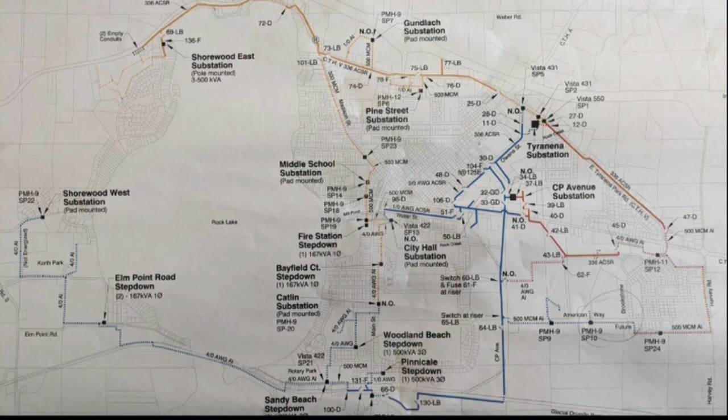For the rest of the next 36 hours, my crew was on call, out in the field that whole time, addressing exactly what had happened. We ended up finding meters that had been blown out of their houses. We had 22 of these in total. We're also still dealing with meters that are malfunctioning, and we have not gotten a total on that yet.

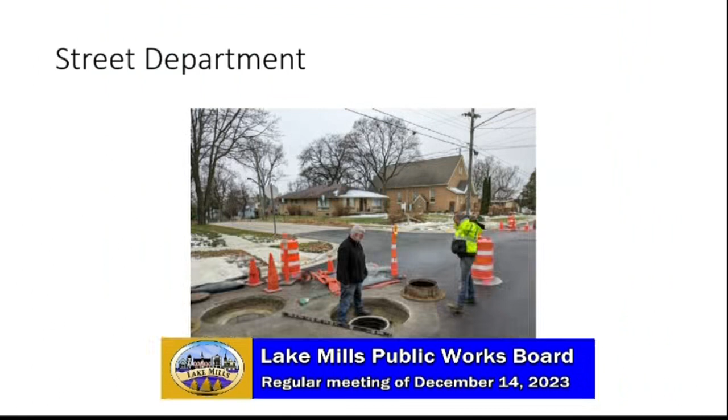Now, in the street department, in the last few weeks, this is on College Street. If you might remember, I told you how we had some punch list items that had to be dealt with, and one was some very low manhole covers that were basically causing a significant drop if a car drove over it.

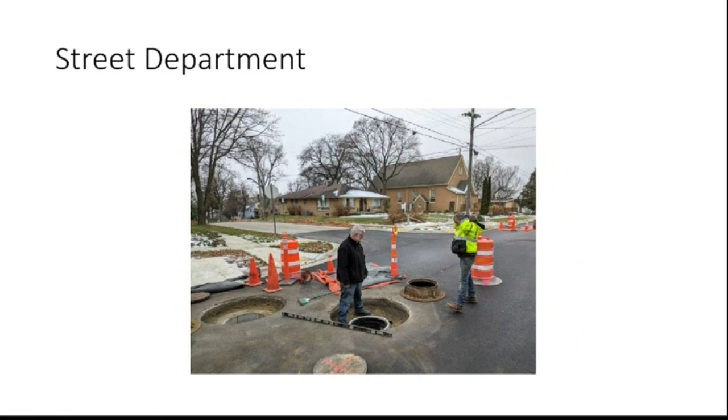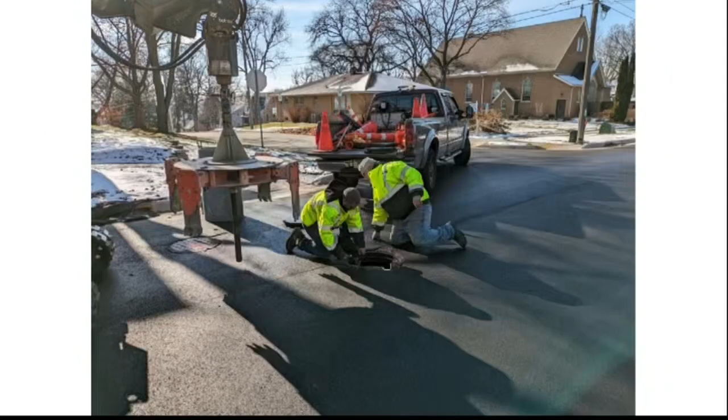So we had the contractor, as part of the contract, remediate these. They did it in a rather interesting way. This circular cutting machine will go and cut out around the existing manhole, then they're able to do a nice clean circular cut of the asphalt.

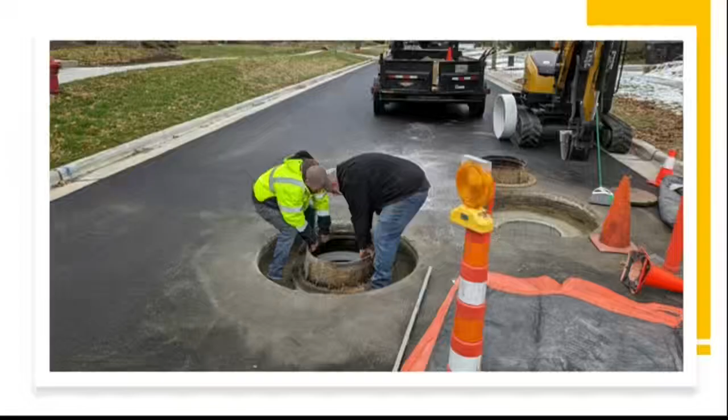They then put in a riser after they measure it, and replace the casting. Then this is the end product. They backfill with concrete. Because of the cold weather, we took cold weather precautions for the concrete with blankets for a period of 7 days or so, and I feel it was a good success. I was very pleased with the end result.

This has been the balance of the time we've been spending with the decent weather we're having. We're really pushing to fill in as many potholes as we can before plow season starts.

Can I ask a question about College Street? There were also some patches between the curb and the sidewalk, in the terrace, that were re-excavated. I saw some new grass, overlays in sections. What happened? One of the residents requested that we mill out the tree stump that was in one of the terraces, so we did some late restoration there. That was primarily it, just restoration from the project.

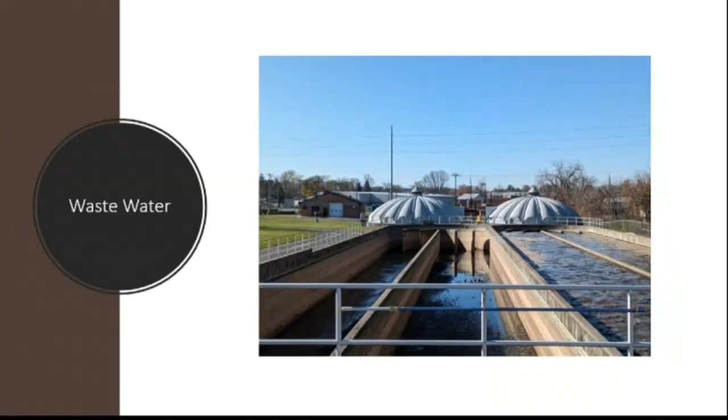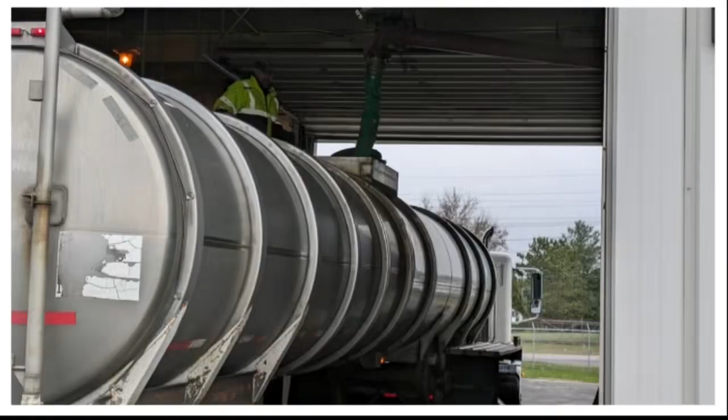Moving on to wastewater, exciting things are happening if you are a wastewater nerd. First off, this time of year is when you try and get rid of your sludge, and this is very important, our tanks are filling up. We do this per our DNR permits, but we spent about 2 weeks getting rid of our 3 tanks of sludge that were very full. I won't explain too much in detail of what they're discharging into the tanks there.

Now, the exciting things that are happening, these are our oxidation ditches. Every other year we clean one out. We'll dewater it, and what happens is, at the base of the ditch, it's just natural that you'll get grit that builds up. So it's important that you dewater this and start to remove it. This has been a process we've been taking on for the last 2 weeks. It is now completed.

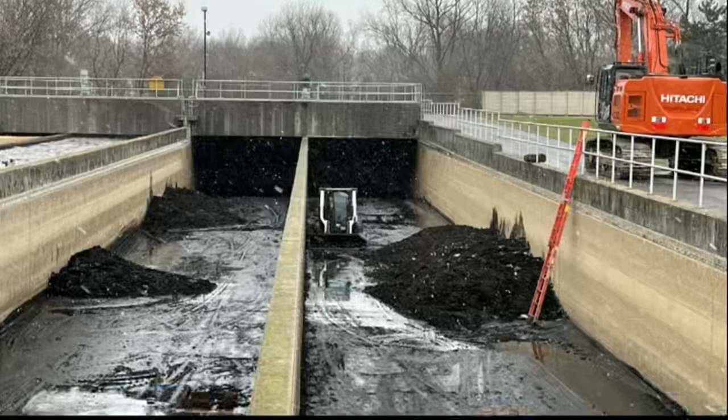You'll see what we do is we lower down a skid steer and start scraping all the grit. This is mostly just sand and dirt, some other particles in there, but we take samples of it, submit it to the landfill, and if they approve it, which they normally do, then we are able to haul it to the landfill.

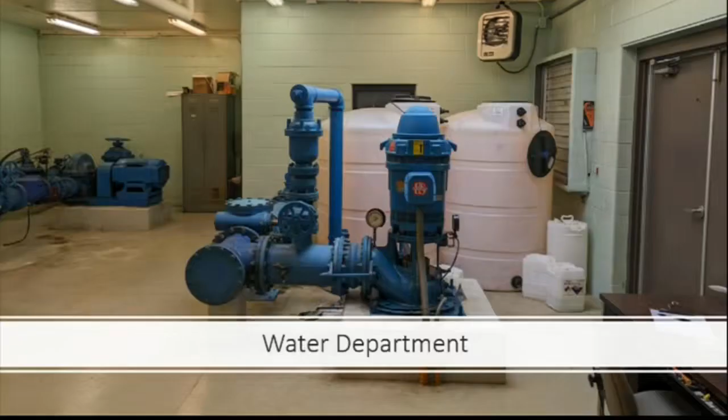Things have been fairly quiet with the water department. They've been doing a lot of maintenance on our wells. During that power surge, we did have 2 wells that were affected and the diesel generators kicked in. So when that happens, it's a good time to do some maintenance on your diesel generators. They often get overlooked when we're busy, until all of a sudden we need them. But everything worked fine in an emergency response.

Just wrapping up the report here, in the Public Works Department we have recently hired 3 new people, 1 in wastewater, 1 in water, and we are hiring a fleet mechanic. Traditionally in Lake Mills they've had a mechanic in the street department, but I've had very good success in my career with a fleet mechanic, someone who can also handle vehicles from other departments, such as police and fire. Working with Drake, we made some budgetary arrangements so we now have a fleet mechanic who's going to get training in fire pumps, and we believe we're going to be much more productive this way. We have filled that position now.

We have also filled the position of utility billing clerk, and we are currently going to be advertising for a position in the street department that has been vacated, just yesterday. And that is my report.

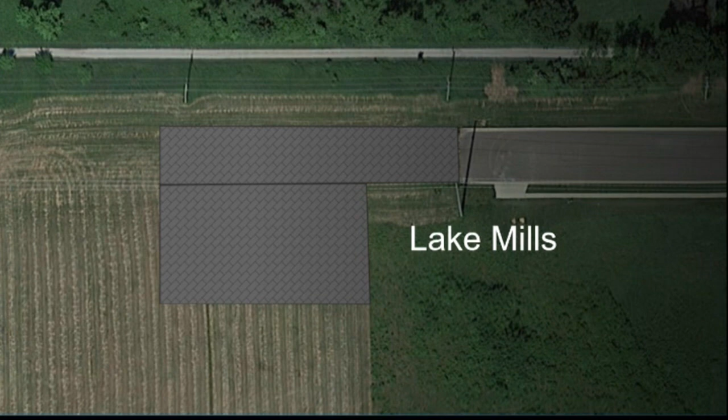Next. So what we are proposing is this is the end of CP Avenue, and we are proposing to clear the topsoil and unsuitable soils for about 160 feet, and then clear the pad for the actual drop-off site here. Next.

And these are just my diagrams to show you what that looks like, give you a visual. How big is the current one? 160 by 60. I'll have those dimensions out here soon.

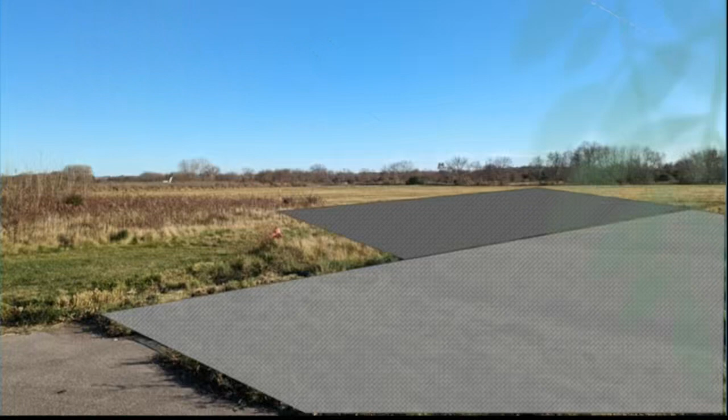Another slide, next. But you see, we do have a lot of open space there to use. Next. And this is the beginning of what we had proposed building.

The dimensions of the pad mirror the ones that currently exist. Again, it's about 155, 160 wide by 60 feet deep. We currently have 3 bays, but one is for other construction debris to be dropped off.

But we propose to build this roadway and pad with 3-inch stone for sub-base and then 1.25 for the base. And the red lines represent fence. Next.

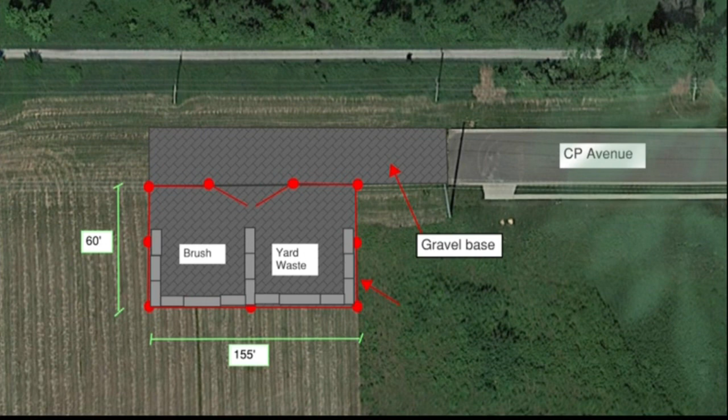And then if we want to consider, we have the ability to run power down these 2 poles here, and we could put security cameras there.

And yes, then go with that fencing. Now I just want to point out, we could have considerable savings if we were just to run the fence across CP Avenue here and then put some barriers up here. So we do have a few options there, but for the cost slide I'll be presenting here, I did not put that in there of the savings we'll have if we just ran a fence across the road, but just bear that in mind, please.

Next. So what we propose to do is strip the pad in the driveway, build about a 12-inch sub-base of 3-inch crushed stone, and then cap that with 6 inches or so of 1.25 inches. Then we compact the road base and the building base, and then we would contract out or just buy the material for the fence and the gate. And then the options would be the security cameras or anything else we'd like there.

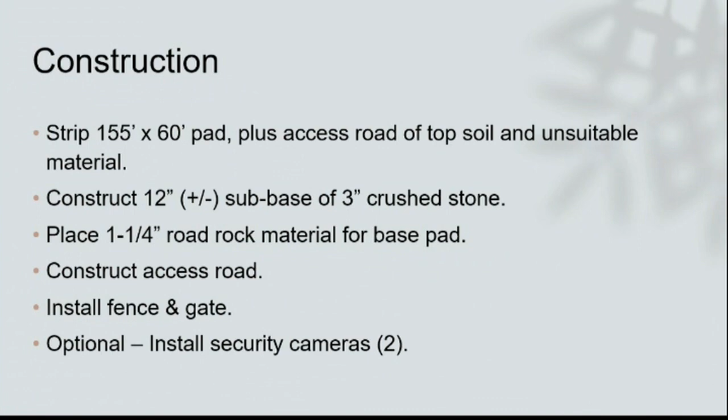Next, please. And these are the rough costs of everything. Obviously the lion's share of the cost would go for the fencing. The stone, there are some variables there for cost. Some stone we do have, some we can acquire maybe at a cheaper price, we'll see. But Mark was able to get these prices from local quarries.

Yes, go ahead, Mark. You're going to say something? Oh, I'm sorry, sorry, I thought you raised your hand there. All right.

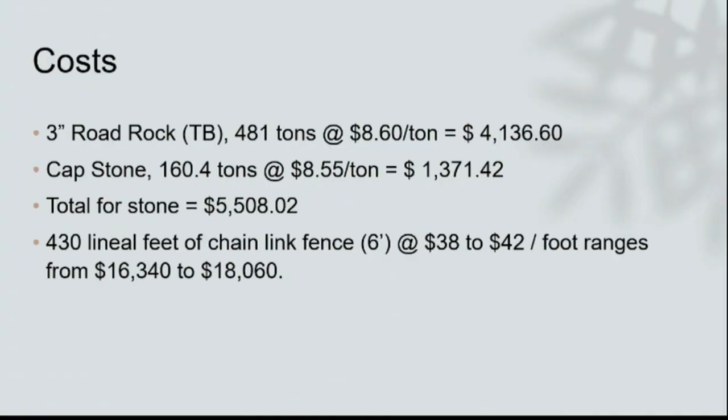But yes, that's where we're at with that. I would propose with current staffing and current location that we could have a staff member open this access up every morning and close it at the end of their workday. But if we want to entertain extra staff or some other sort of controlled entrance and exit system, then you could create your own hours, what you'd feel were best.

Any questions? Can you go back 2 slides, please, Dave? I just want to keep it on that one.

I will bring up too, it just reoccurred to me. We would like to eliminate - currently we are receiving some concrete in that, and this is an extra burden. In the future this would be an extra financial burden for the city. I would like to eliminate that service.

I would suggest we did anyways. This is something that either residents could find ways to get rid of the concrete on their own, take it to a landfill or such. But right now, with this design, we're just thinking of yard waste and brush.

I believe we changed John's disposal contract to allow some disposal of some materials like that, limited quantities. In bulk pickup, I'm not sure what construction materials are allowed. That's a fair question. I do recall looking at the contract and there being a new allowance, but I don't recall specifically. It's something like 50 allowed pounds or less per container, and things like that - not large quantities like obviously the current site takes. But I just wanted to mention that there is already that alternative available to residents.

Okay Dave, do you want to share on your end, or do you want me to share the presentation myself? You can go ahead and share it, Travis. Okay, one second. All right, are you seeing the presentation? I think that's... no. Municipal water. And there we go, now it's up. If you go back to presentation mode. There you go, does that work? Yep, working now, okay.

All right, so talking about the wastewater treatment plant facility planning, I've got a few updates adding on to the discussion that we had in November. I've got some follow-up on the project costs, and then there were a couple of questions from last time that we can talk a little bit about on biosolids drying, and then some of the non-monetary factors for the options we're looking at.

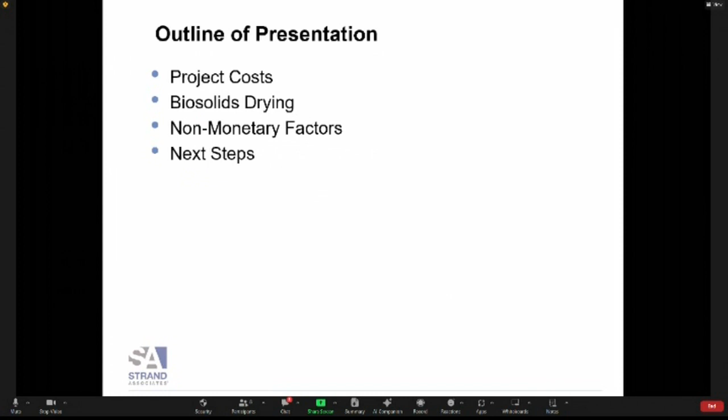So this slide here is just a repeat, you've seen this slide, but I wanted to refresh our memories when we were looking at the draft rate impact, comparing phasing at the existing site with the aerobic granular sludge system versus moving the treatment plant to a new site, constructing a brand new facility. Phasing at the existing site over multiple phases allows you to ramp up the rate increase over the course of 15 to 20 years, and projects can proceed as needed throughout that time frame. There's more flexibility from that standpoint versus going to a new plant. The rate increase, I'd assume, would start once that decision is made, and you'd have to have it complete by the time construction's complete. So it's a much narrower window to get that rate increase accomplished. Just a refresher on that.

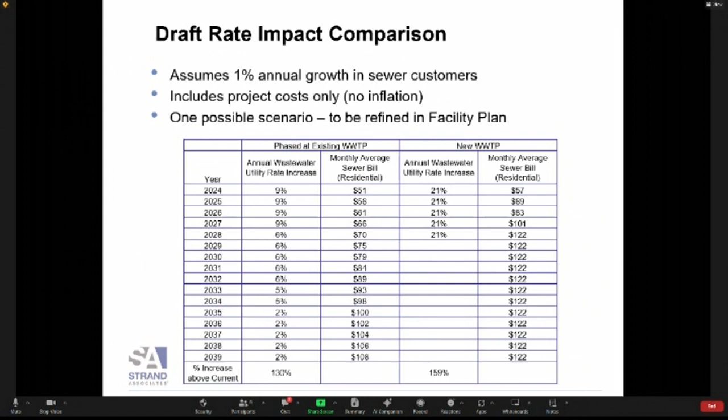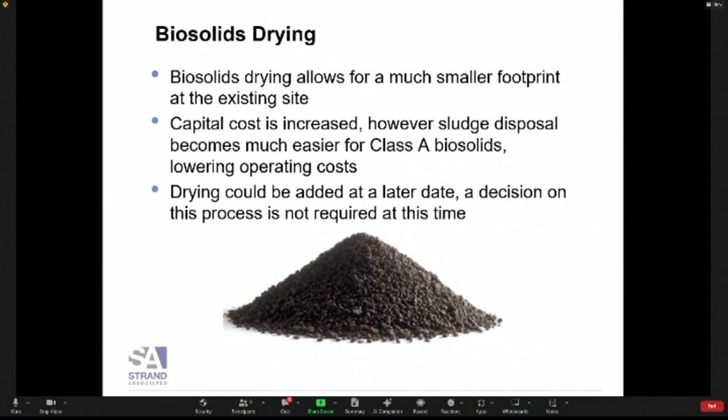So just wanted to revisit the pros and cons of these two options, focusing also on AGS at the existing site, since that wasn't specifically included in the original evaluation, and we've been looking at that more as a way to tighten up the footprint on the existing site. So just going over pros and cons of existing site with AGS versus a new treatment plant. In both instances, I'm assuming they would eventually discharge to the Crawfish River.

So running down the benefits of the existing treatment plant site: you have a significant investment already in the existing site. You own the land, there's an administration building, and there's infrastructure that can be reused, so that's a benefit.

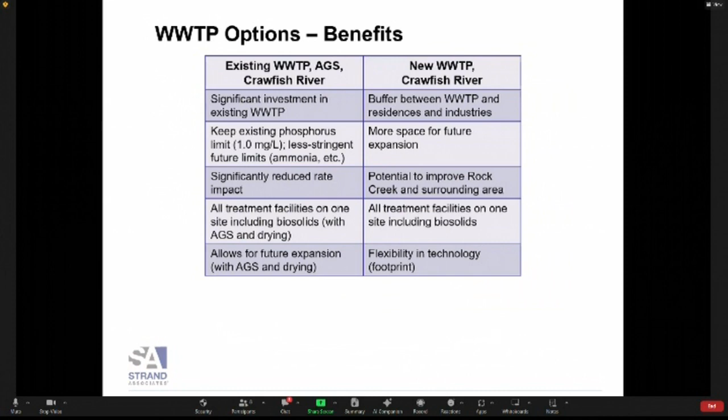There's also potential to improve Rock Creek, and I think that ties back into, with either option we're looking at, moving the discharge from Rock Creek to the Crawfish River is probably the preferred option. Again, you're having all the treatment facilities on one site, and as I mentioned earlier, there's flexibility in the technology. You could really put in anything you wanted on a new site.

And then on the drawbacks: if you stay on the existing site, you will likely need some additional land somewhere for biosolids storage, unless you install biosolids drying. Not immediately, not in the next year, but probably within the 20-year planning period, we'd really have to think hard about how to manage the biosolids program on the existing site.

Land acquisition would be needed for a future treatment plant. So even if you go with this existing site option, it would be good to think about where ultimately, 40 or 50 years from now, if you do decide you want to move the plant, that might be, and strategically purchase some land to accommodate that down the road.

The existing site was built on an old landfill, so that will likely add some cost to the construction. It's not insurmountable, but it is a challenge that will have to be dealt with. It had to be dealt with in the project 30 years ago, and there'll be similar issues that crop up in any future projects.

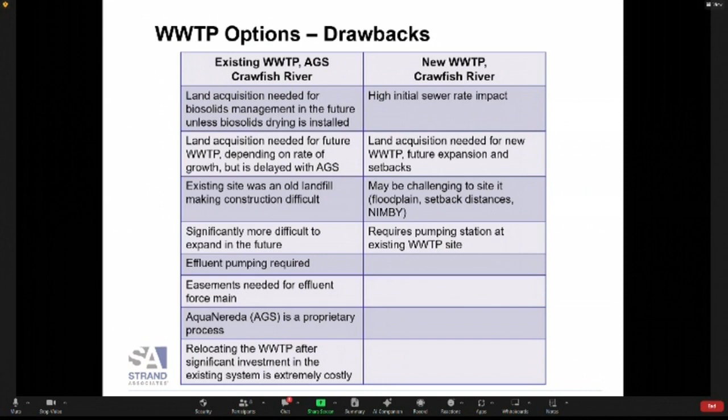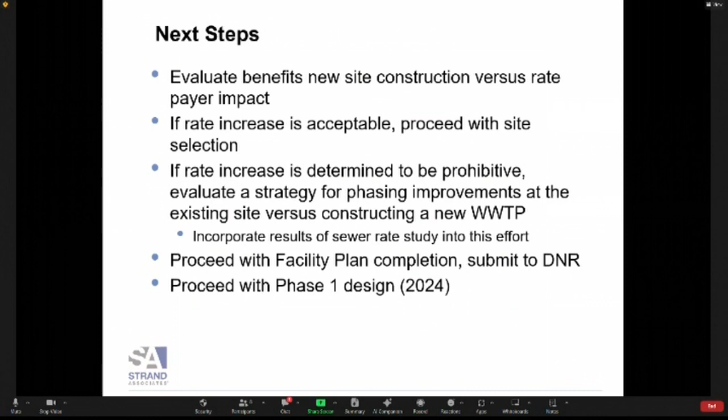So our next steps here is really to decide in this facility planning process if the city wants to proceed down the route of phasing at the existing site or further investigation regarding a new site. And in reviewing the sewer rate impacts, I think that's a significant portion of that decision. And once that decision's made, we need to proceed with development of that facility plan, which finalizes the details of what would be designed and constructed. And then once that facility plan is completed, proceeding into design of either phase one at the existing site or design for the new facilities. So I can back up and go over any of these other items in more detail depending on the interest.

Does anybody have any questions for Travis?

Yeah, Mary? I have a question about AGS due diligence. I think I asked a similar question about the risks at our last meeting. Given that they would be the sole supplier, the risk on acquisition of parts if something goes wrong, expertise, the financial strength and viability of the company. And I don't know how far of due diligence has been completed on this particular firm. I think they're international, with a small number of customers here in the US. So I'm still looking at the risk of that particular option just from a single source perspective. And I guess another way of thinking of it is if we were to choose to go to a new location, would it be our method of choice? That might give me some indication whether the risk is smaller than what I think it would be as a single source provider.

Sure. So the technology was developed about 20 years ago over in Europe, and it's been brought over to the US and it's licensed through Aqua-Aerobic out of Rockford, Illinois, and they are definitely a long-standing wastewater company themselves. Aqua-Aerobic, we work with them on a routine basis. They make all kinds of wastewater equipment, and I would say they're definitely a big player in the wastewater world. There are several plants that have installed this that are up and running, and there are several more under construction. I don't know the exact year it was installed, maybe 5 or 6 years ago. The first one went in the United States, and there's been several installed since then.

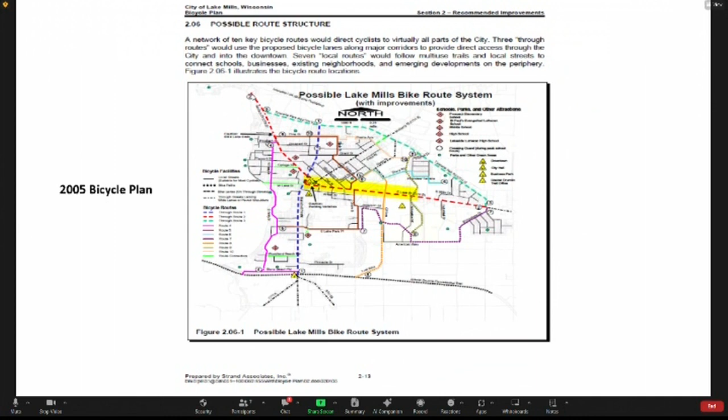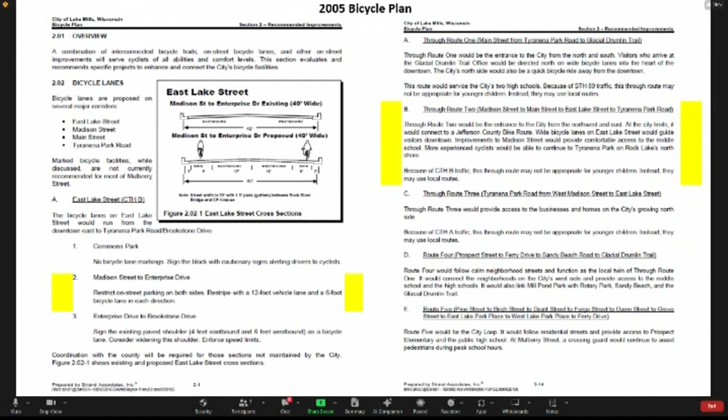The next slide is again from that bicycle plan. The highlighted areas talk about through route number 2 and the area we're talking about, from Madison Street to Enterprise. I'll note this slide, while maybe this isn't the best picture for it, the yellow highlighted does show what we're going to talk about tonight, and it extends from the Enterprise Drive area to downtown and around Commons Park.

I'll note that all of the aerials you're going to see tonight were actually taken in April of '23. They are currently being processed by the county, and hopefully the county website will be up and running soon with the new aerials, but you'll be interested to see the clarity that the new photos bring. Maybe not in this example, but later in some of the pictures, you're going to see much closer pictures and very good clarity.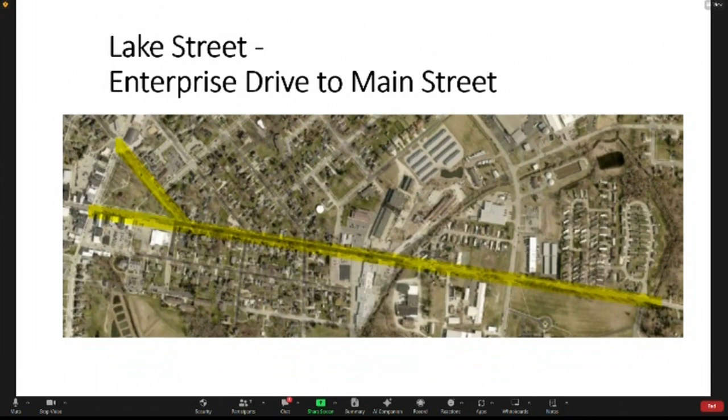Moving on, through route number 2, as we talked about, this is really a connection, and what we're looking at is a connection at Enterprise Drive. The reason we're not going further to the east is that's the location where the jurisdiction of Jefferson County East Lake Street changes. It also is a direct access to a shared use path that goes north and south, which is also route number 9.

So leading into the area of Lake Street, Enterprise Drive to Main Street, we're looking at 2 bicycle lanes, 1 in each direction, and we're evaluating the impacts of low capital investment costs, no major street infrastructure changes, or very little, and then basically street markings required.

The next slide talks about some of the parameters that are used. This is from the Wisconsin Department of Transportation's Facilities Development Manual, also called the FDM. This is a portion of that document that talks about bike lanes on a curb street without parking.

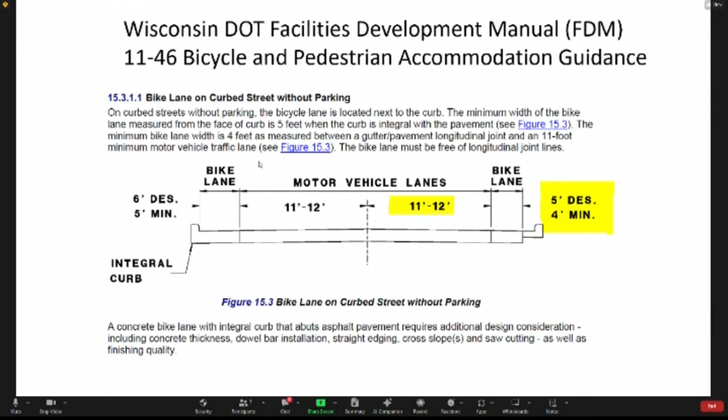So in those areas, typically you're looking at 11 to 12 foot traffic lanes, and then 4 to 5 foot bike lanes. But note that you're not including the pan of the roadway in the case where you're talking about asphalt and concrete transition. So maybe downtown Main Street, that's all integral concrete curb, that would be the left side. But the areas we're talking about today are going to be all on the right side, which is an 11 to 12 foot lane and a 4 to 5 foot wide bike lane, not including any part of the concrete curb. The next slide is also from the FDM.

This shows bike lanes on a curb street with parking, and you can see how that changes slightly. The traffic lanes are still 11 to 12, but the bike lanes are increased to provide more safety from the combination of the traffic lane and the parking lane. I'll note that the parking lane is typically 8 to 10 feet wide, but in this case, now we can count the pan in that calculation.

Moving on, I've provided a couple of cross sections from Main Street. In particular, the one on the bottom shows what happens between Lake and Madison on Main Street, and there is actually two bike lanes and parking on both sides, and that requires, I believe that requires...

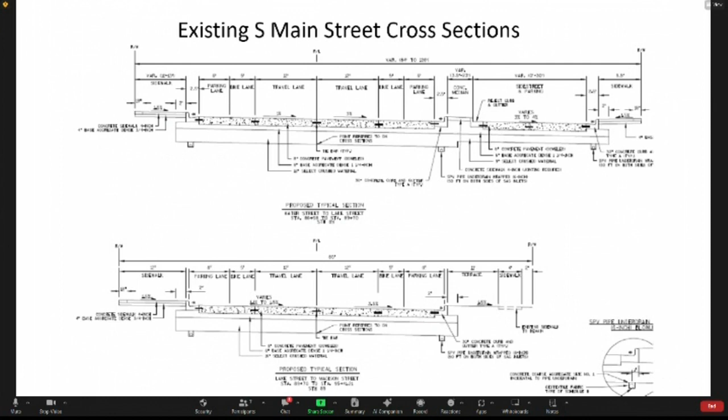51 feet of concrete from back of curb to back of curb. As we extend into our further slides, all of the streets that we're going to talk about tonight are not this wide. So we also looked at a typical cross section down South Main Street, and if you recall, that's one parking lane on one side, and bike lanes on both sides requires 44 feet back-to-back, or 42 if you're using an 11-foot lane.

So I'm using this as we head into this further evaluation. What is the width of Lake Street? Lake Street has a width of 34.5 to 36 feet from Enterprise Drive to Madison Street. The existing width just does not support even one side parking with two bicycle lanes. You need at least 37 feet. So that option is not available.

What could be proposed is eliminating the parking on this stretch of Lake Street, providing two 12-foot traffic lanes with 5-foot bicycle lanes on each side that will fit in this corridor. As we move further to the east...

You'll have to say something because he won't. Dwayne? Is there any questions? Yeah, Dwayne, I have a question.

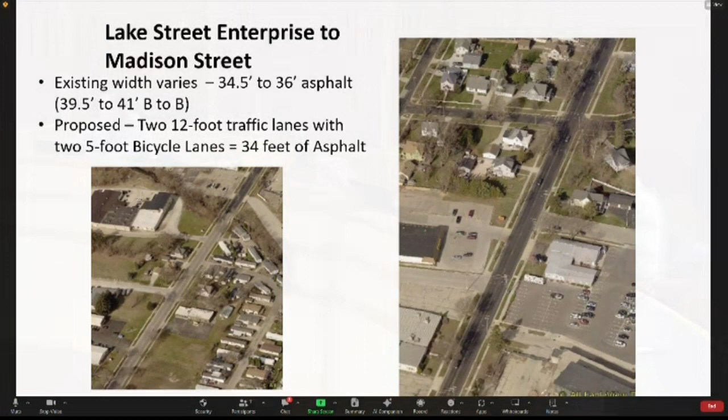Sure. Because you're talking about the... is there a scenario that because I've seen these in some cities, and actually I printed a picture out, where you could do a dual bike lane on one side and then have one side, so you have, it's not for a bicyclist, is not the ideal scenario, because you're going cross, one lane is going with traffic and one's going against traffic. It's on one side of the road, and then you still maintain one side for parking. Would that fit with the width of the street that we're talking about this evening? I'm not saying I'm describing it correctly, but you have your both lanes, your bike lane is on one side, and then you park on the other side, and then your cars are in the center.

So the bike lane supports bicycle traffic going both ways. Both ways. And I don't know if I can pass this down, but I mean, I should have made copies or photocopied it and uploaded it, but I didn't print it out fast enough. The photo has barriers between the bi-directional bike lane and the traffic lane in the photo, like there's a small barrier, and I think it'd be too tight.

I was just curious. It means you use the pan. Is that what you call it, the pan? You'd have to use the full, like the curb. Mary, I do think I know what you're talking about. Again, it goes back to, in order to provide that barrier, you're introducing a capital cost that we didn't look at.

Or paint, we could look into that further. I've seen it with colored paint and not with all of these posts as shown in this picture. It was just a question.

Another option that I hadn't seen in the exhibit you'd been sharing—I would caution, and I think I heard somebody mention it, about having those competing directions. I believe there's information in the manuals that talks about separating those going in the same direction with traffic if there isn't some type of barrier. But I can look into that further if that's something we want to explore.

Yeah, that was my question. I had the same question, but I saw a presentation from the City of Madison planning department. They call them two-way lanes, and they make sure they're wider than 3 to 4 feet—they go with 5 or wider if they can get it. That then allows them to do parking on the other side. The City of Madison does this on a number of different roads there.

I'll go back to the first statement—our analysis tonight was not to increase the capital costs significantly, and so all of those types of options are still out there. My gut feeling is that it probably means we need to push one of the two curbs further to get a little more width in order to do some of those options. I have not found an option yet that allows parking on one side and a two-directional bike path on this street. Does that help answer the question?

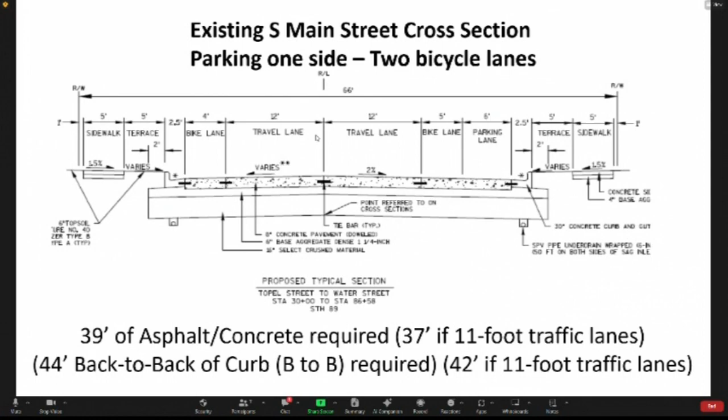Yes, thank you. But I'm sure staff and I would look at other options if this board is requesting that, as we finish the presentation tonight. Any other questions while I'm where I was at? Well, I was thinking maybe we should just finish the presentation and go after those questions after the fact, since you might address some of this.

Maybe. All right, why don't I proceed? In general, as we've been talking about, it's one or the other in this area from Lake Street to Madison Street. I'll talk a little about one option that Mark and I, when we were measuring it, were concerned about, and that was Rock Creek.

It does allow for basically two options here. There's a narrowing at Rock Creek for the box culvert, but it does allow two options: either two 11-foot traffic lanes and 5-foot bicycle lanes, or—and that one's preferred because you have a wider bicycle lane as it comes up to this bridge.

The concern with the first option is if we're at 12-foot wide on the remaining portion of the street, you're going to see aesthetically the lanes narrowing at the bridge—meaning the traffic lanes. So the other option is to keep the 12-foot traffic lanes but narrow down to the minimum 4-foot bike lanes at the bridge.

Visually, the second option is probably better, but safety-wise, I think I would prefer to see option one implemented. But both are possible as far as the width. So the concern we initially had—we did find that there was an option.

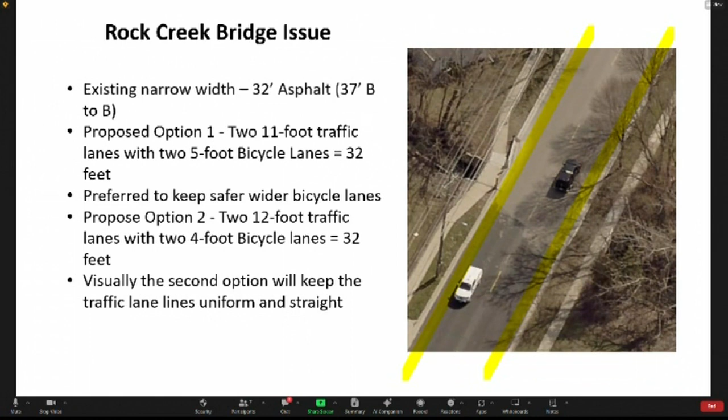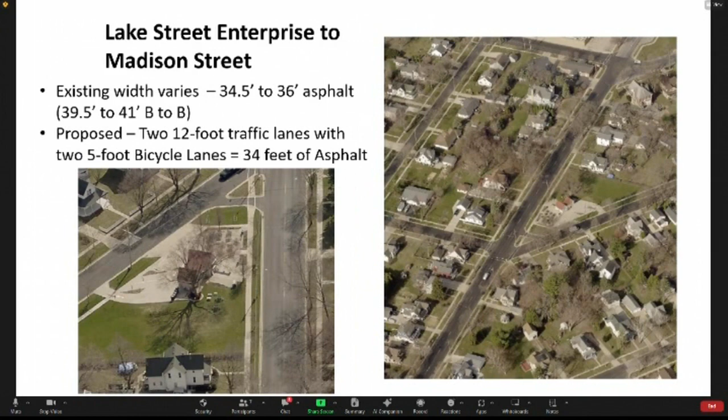Extending east, continuing all the way to Madison Street, the same analysis occurred west or east of the bridge. Then we get into two different topics of how to get around Commons Park.

We looked at two different alternatives. The first alternative is a single one-way bicycle lane along westbound on Madison, then coming back eastbound on Lake Street. So in a sense, you're taking a counterclockwise travel around Commons Park, using the Main Street piece between Lake and Madison as well.

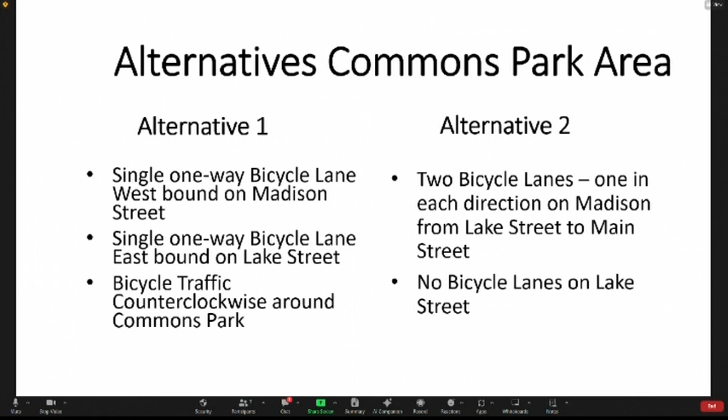A second alternative we'll talk about later is that we can't really extend the bike lanes on Lake Street all the way to Main because of Ford Court, or we would have to change Ford Court. This alternative number two takes both lanes from both sides of the road and turns at Madison Street, connecting to Main Street at that location.

So now I'll head into alternate one and speed through some of the analysis. My next concern, or Mark and I's next concern, was this rumble strip here. It does fit with an 11-foot traffic lane, a 5-foot bicycle lane, and an 11-foot traffic lane. There's 16.7 feet between that rumble strip and the curb. In this area, it's already no parking, so at the rumble strip we're not changing the bike lane or the parking at this point.

On the opposite side of the road, there's a narrowing occurring. Again, that's fine—two 11-foot traffic lanes, the 5-foot bicycle lane, and in this location, parallel parking is 33 feet. There is 34 and a half feet there, so this would work in those two narrowed areas.

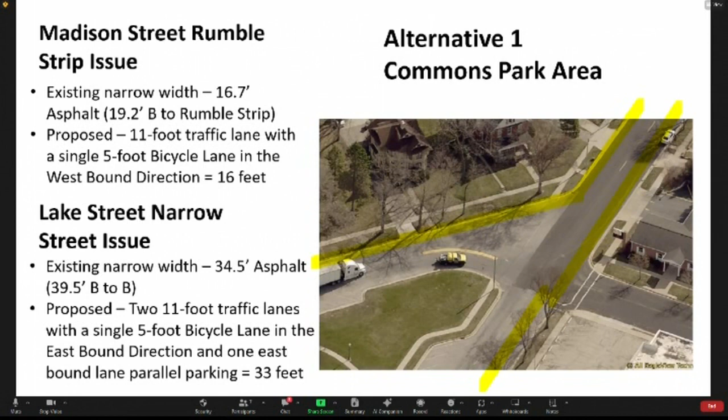I provided a couple documents here. I don't know if we need to go into too much detail—it's from the standard detail drawings. It shows parking layouts in the areas of downtown. They're at 45-degree stalls, so you can see some of the dimensions that we used to do some of the calculations.

There's two options we've looked at. Option one takes away the parking on the north side of the road. We would lose potentially 13 to 15 stalls. It would keep the parking on the common side the same, and would actually provide a little bit of a buffer between the traffic lane and the bicycle lane. Unfortunately, all of those things can't occur in that area.

Option 2 on this next slide talks about the exact same thing, except in this option, rather than losing the north side parking, we're adjusting the south side parking, changing that from angled parking to parallel. This does fit, but unfortunately, changing the angled parking to parallel does cause a loss of 16 to 19 stalls.

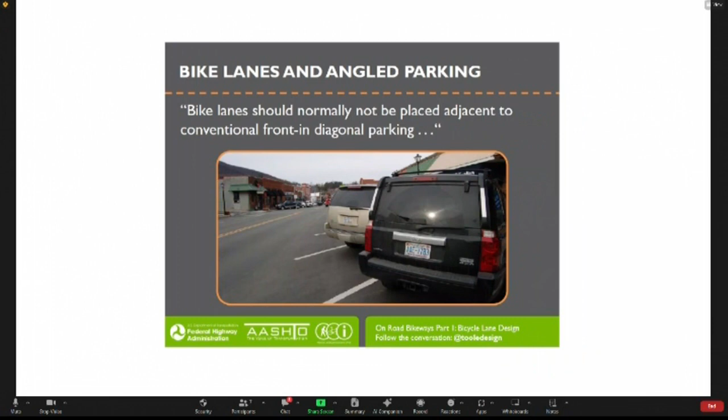So I give you that slide so we can talk about this next portion. In order to make this recommended, we would potentially have to change the angled parking on the south side of the road from Main Street to Ford Court. The width is there, it would work, but it would create a reduction of 6 to 8 stalls.

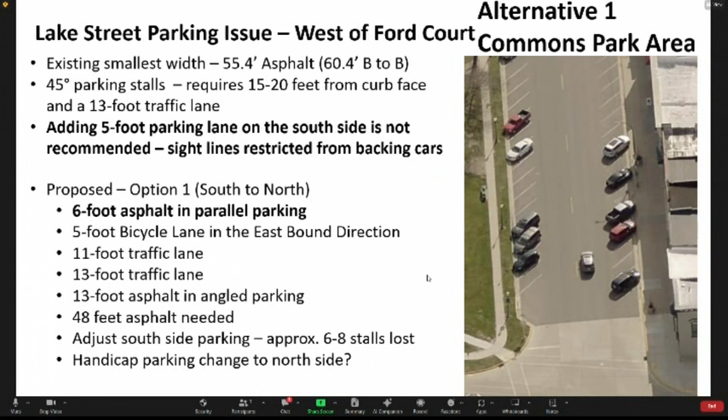One additional factor in this area is there is one handicap parking stall. There's a number of different options—we can move that handicap stall, maybe not directly, but to the north side of the road near Ford Court. It could be marked in one of the existing angled stalls, or we could look at some minor capital investment costs. Here's one example where the curb was replaced and lowered so that the parallel parking handicap stall can access the sidewalk on the right side of the vehicle.

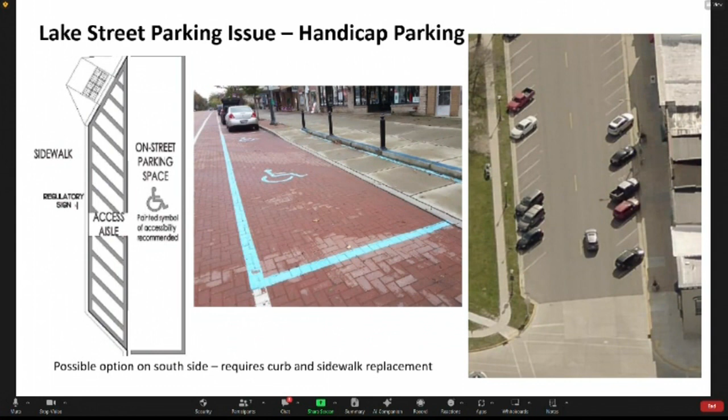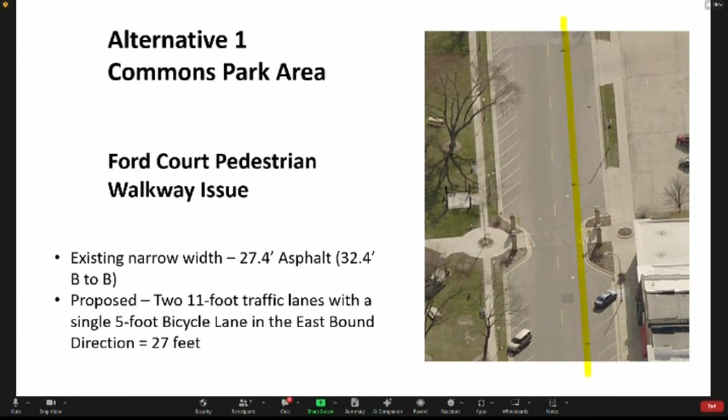The next issue we were very concerned about is Ford Court. It's probably the narrowest portion along this route, but it does allow for two 11-foot lanes and a 5-foot bicycle lane in the eastbound direction. It's 27.4 feet of asphalt, and we need 27 feet. Very close, but acceptable.

Then heading east of Ford Court, that parking would stay the same. The width is appropriate, and that eastbound lane for parking can exist. We've already talked about this piece earlier. As that eastbound lane continues, the width is there for maintaining the parking.

So let me summarize alternate one. Alternate one, option one, going around Commons Park unidirectionally counterclockwise, we would lose somewhere between 19 and 23 stalls. This is option one, losing the north side parking on Madison Street and changing a portion of the south side parking on Lake Street to parallel downtown. Again, it removes, and in that number is...

All of the parking on Lake Street east of Madison Street is gone. Option number 2 in alternate one, changing the angled parking on Madison Street, and also the angled parking on Lake Street, accounts for 22 to 27 stalls lost.

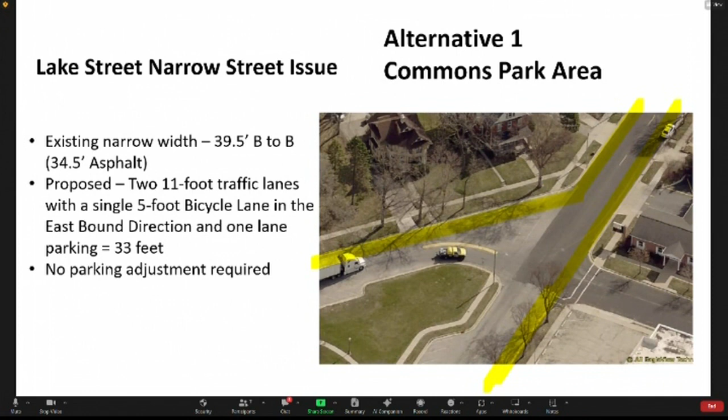That was alternative one. Let's talk a little bit about alternative two, and then I'll open it up to questions. So alternative number two now says, let's get off of Lake Street downtown. Let's stay on Madison Street. Let's do two bike paths both directions.

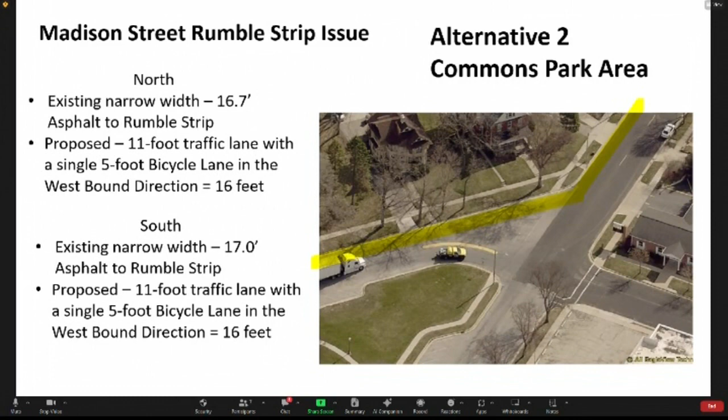Can we do it? At the rumble strip, good news, both sides have 16 feet, so we can do exactly the same thing we did before. As we extend into the downtown area, unfortunately, too narrow again, but we can change the south side parking to parallel, and it would fit.

This would account for 16 to 19 stalls lost, in that transition from angled parking to parallel parking. There's one other concern with this option, alternative number two, and that is at the right turn lane. While it fits the two 11-foot traffic lanes and two 5-foot bicycle lanes, unfortunately, there potentially could be a loss of a stall or two as you approach the intersection because the traffic lanes and the bike lanes would interfere with those last couple of stalls.

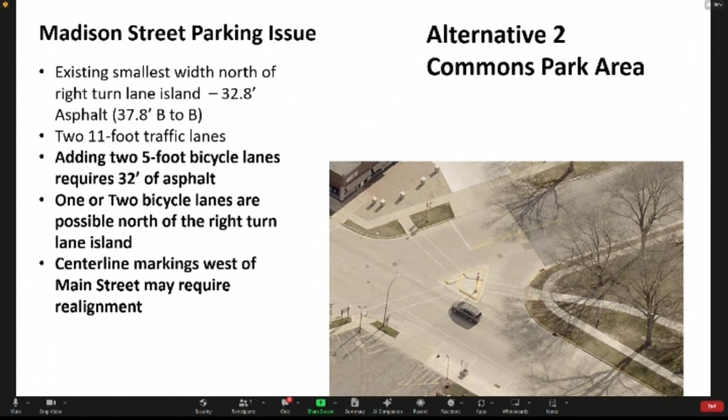So I'm predicting that we would lose 1 to 2 more stalls. This alternative number two then provides a loss of 17 to 21 stalls. Are there any questions? I hope I explained the numerous different calculations that were done for at least these couple of options.

I have a question, and I waited till the end, Greg. I was curious if you have studied or looked at the possibility of back-in diagonal downtown as an alternative, for safety. It's common, like in Austin, Texas, San Antonio. I mean, a lot of places, and that might be... I don't know if that's in capital investment because I'm thinking it's paint, but that's still an investment as an option. I did come across that.

I didn't add a third alternative. I was looking for a little bit of feedback on how we should proceed. Again, as you've noted tonight, we could have probably done 10 different alternatives. So I'm glad you brought it up, but I didn't take the time to add that alternative to this presentation tonight.

I have a question. I know you were trying to keep the capital investment down, but have you thought about two-way at the sidewalk level? That's another option that Madison seems to be doing. That might be an option around the Commons Park, so you can save some of the parking.

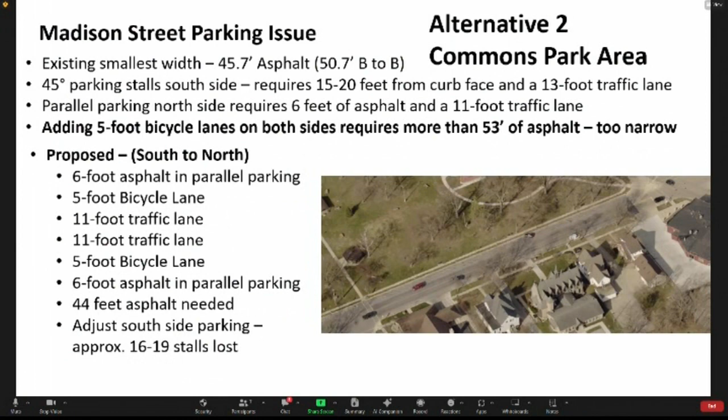Well, all those options take up a lot of parking spots, but I don't like any of them. That is a big concern. Yeah.

My next question is on East Lake Street - is there a street redevelopment coming up on that street, and how far out is that?

Glad you brought it up, Mark. Mark gave me much of the ratings this week - we just finished entering our rating system this morning, actually, and we'll start doing analysis for next year's maintenance plan. We talked exactly about that. Lake Street is coming up on a chip seal decision, probably in the next year or two - I believe we're at the 7-year mark. Again, if you recall, we'll have a very large list this year because we're getting into that backlog. So really the decision on what is to be done with bike lanes here may affect when or how we do that maintenance.

That street will definitely, when it does come up, Greg - Mark and I even had this discussion this morning - is at what point are we looking at mill and overlay once again? I think I'd like to try and get one more chip seal cycle if we can, but those are coming in the next 2 years. So I think staff would like to incorporate both of those things at the same time. If we know we're going to do some type of restriping, then let's do the maintenance first, or vice versa - do the striping, see how it's working, delay the maintenance for a number of years so we can find out if one plan is working or not. Then as part of a maintenance plan, maybe we can incorporate a second option. Does that help answer your question, Greg?

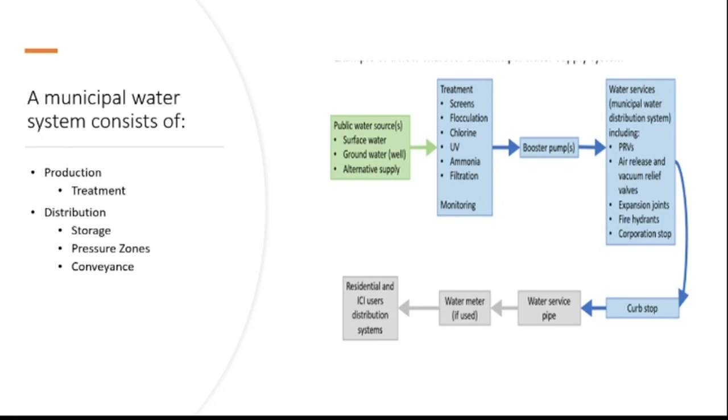I'm just going to draw on pictures from a construction perspective of different projects I've been on. This will give you an idea when we're talking about water main breaks or valves failing, what we're looking at or what we're talking about. Next slide, please. And the next slide.

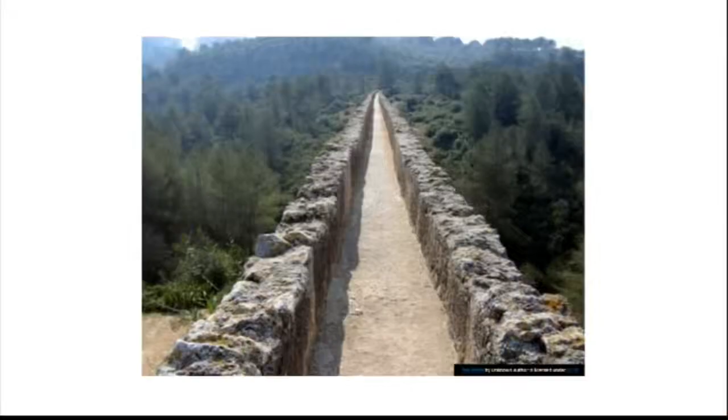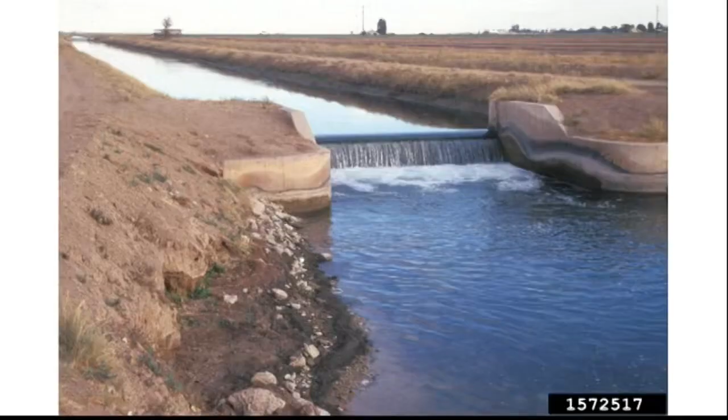Historically, civilizations have delivered water through an open air system, open air trenches, relying solely on gravity. This is a marvel to me, but it's considered antiquated. Still to this day, cities like Los Angeles rely on open air trenches, which requires a lot of treatment.

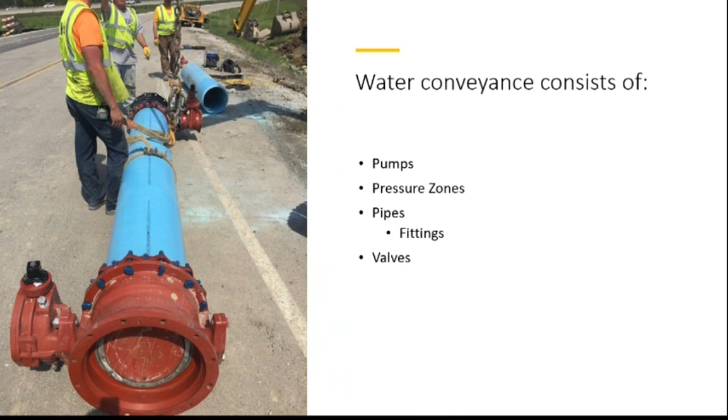Here though, we have a closed system. Our system relies on pumps, pressure zones, pipes, and with pipes, fittings and valves.

We, like most communities, have basically a grid system. It's a quasi-grid system because these systems are never built all at once, they're added on to continually. A grid system consists of your transmission lines, your heavier lines focused more on the volume of water, and then they sub off into the distribution pipes.

Whenever you have your distribution pipes going off laterally, you're always going to have your valves, like right here, right there, and the valves control the distribution. The valves allow us to isolate certain lines if we need to, and regulate the water.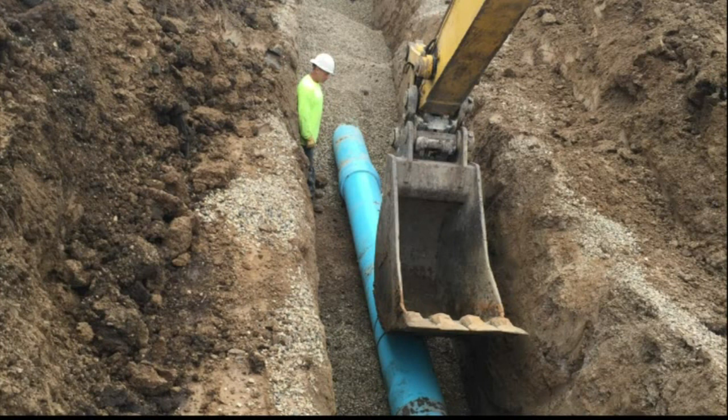The next three slides are just showing you some transmission lines. These are often oversized, and again they just focus on volume, not pressure so much. This is a project I've worked on with a 16-inch water main here.

In this particular case, this is C900. I've done a lot of projects with PVC pipe, either C900 or C905, and with every system like this you'll always have cast iron fittings. This is again the transmission system. On the next slides we'll get into the distribution lines.

Here you can recognize this as distribution because you're starting with a valve right off of a main. This is a very large valve, it's a gate valve, and when you crank on this it'll pull that gate up. This is what you'll see out in the street once in a while.

Someone from our water department will have a long key going down a little pipe, setting the end of that key onto this nut right here. This will take about 50 cranks to get all the way open. This particular system was cast as ductile iron.

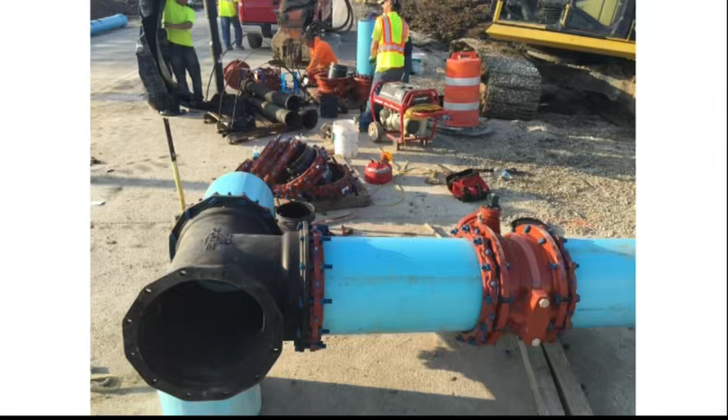This is an example of a transmission going into the distribution here. This is a trans line, it's heavy, but then we have a T going right into a valve right off. So from this point forward, this line system would become distribution.

This is another good example, this is all distribution now. If you have the finances, you're going to have 3 control points at every intersection. So this is my T, but we have valves at all 3 points here for this distribution. The more valves you have, the more options you have for shutting water off and isolating the problem without affecting too many customers.

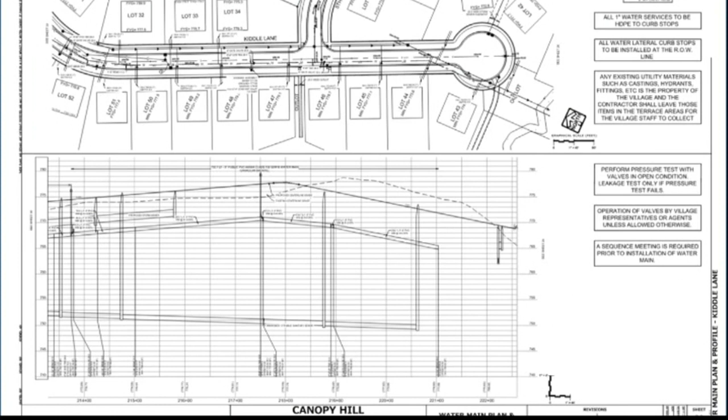This is just a plan sheet to show you. I'm going to isolate some of these shots here just to give you an idea of why we build these the way we do.

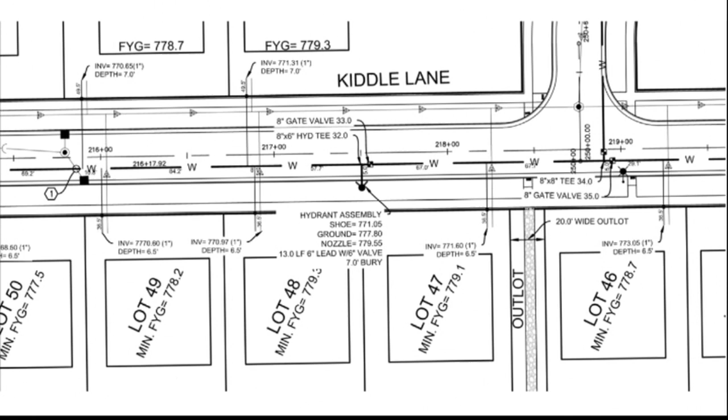So in this site, you'll see the water main here, and in this plan sheet, it's calling for a hydrant right there. This is the distribution line. It's going to be a little smaller now because the smaller you go, you're able to increase your pressure to your end product, to your client.

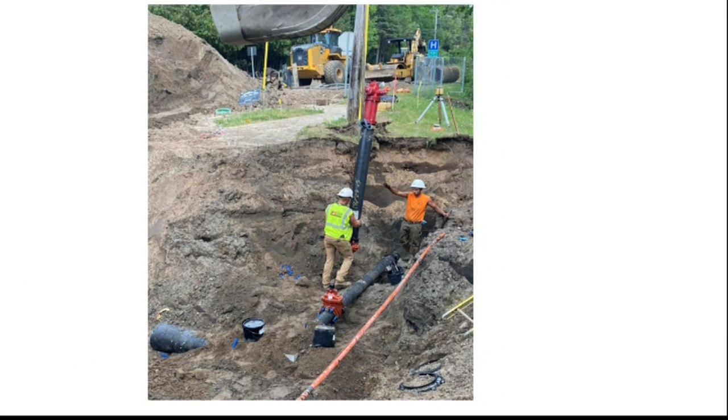Next, here are some hydrants being installed, just like the diagram you saw. Here's your water distribution main, but there's your valve right there. This is typically a 6-inch valve. Then you have your lead, and there's the shoe with the riser going up to the hydrant.

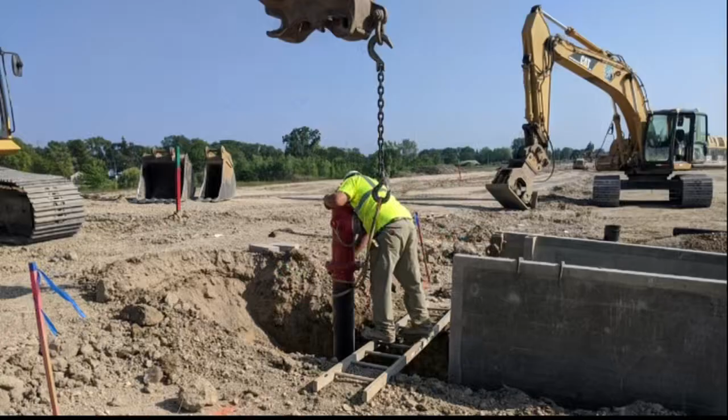We go back a slide, Dave, please. Oh, I might need to go back more than one. Another slide, please, back there. I'm guessing, Mary, that the plate has something to do with the valve. Okay, a valve, I'll have to look and see if it says. Now, it's possible. How big is it? It's like, it's around like this big, maybe like a plate, like this big around, it's right in front of the, oh.

What would a casting be, and should I be shoveling it? Yeah, it looks like a little baby manhole. But too small for a man. Oh, well, not necessarily, just curious. I'm learning about this, and so I'm like, hey, I'm seeing that little round thing that's in front of the hydrant by my house. And I'd have to look and shovel at it every winter, I can't tell ya, because I don't know what it's for, but.

I was thinking, we do in construction, we'll run a tracer wire here, and oftentimes we'll have a little pipe going up from that point with the tracer wire at the top of it, so we can connect to it, but okay, we'll figure it out. Okay, send me a picture. Next, and next, there, okay.

Next. So those are also called laterals, correct? Services. Well, typically, some are different. You consider sewers laterals and water services. Okay. Do you agree with that, or?

It depends. In my world, it was always sewer, lateral, water services. Tomato, tomato.

This is a profile view of a water service. You have your water main there, this is your corp stop, and then you have your lead to your valve box. This is what you'll see, a little round plate, normally in a terrace, road, or sidewalk. They put a long key down there and rest on this nut. This way they can shut off or open up the water going to a residence. This is typically the edge of an individual's property line, the right of way.

This is the plan view of it. That's the corp, that's the top of the valve box, and then this would be where we would connect, or the customer would have connected their water to their property.

For the lead service, we're responsible up to the property line. From that former picture, we call it the right of way, and from that point on, that's the homeowner's or business owner's responsibility. So if that part is lead, that's their responsibility. We can't even do it for them. We don't want to, and they probably wouldn't want us to.

It's best for everybody. This is just another example that included the foundation of a home, that's why I threw it in there. You have your corp stop and then your valve box, and it just shows you how for most homes it will go underneath the foundation. Nowadays these meters are inside of the home.

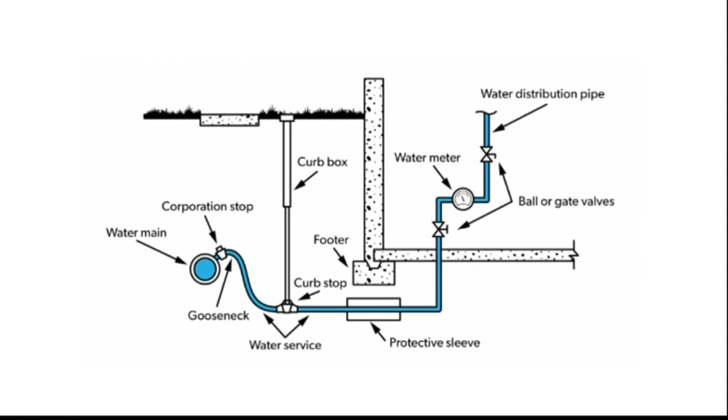This is a corp, what I was just describing as a corp stop. This is something we mount, a saddle that we mount onto the pipe.

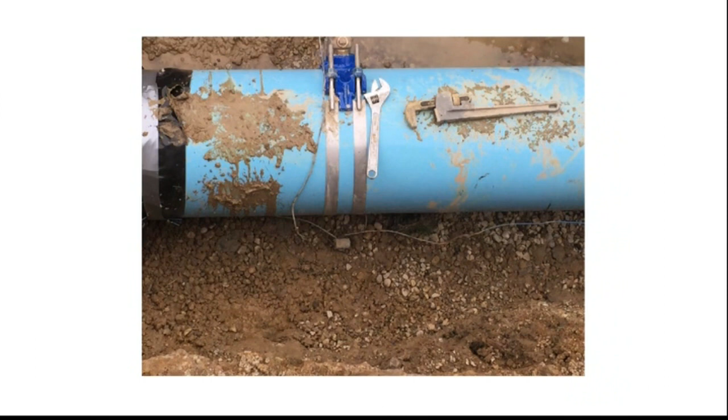This is the corp mounted. Once we mount the housing there, we then drill the hole through the housing into the pipe, and then we put the valve on it. And there's a good example.

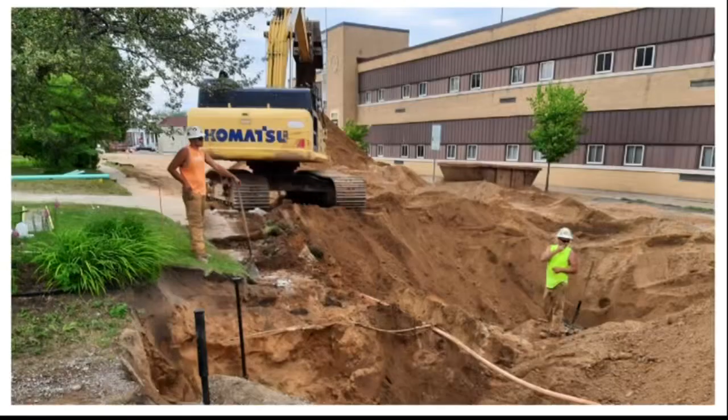This is water service going into a residence. This is a poly pipe, typically 3/4 inch or 1 inch. If the picture continued, you would see your valve box up there.

Here's just a field example. This is the valve box right here. That gentleman is standing on the water main. Don't be fooled, this is a gas main valve right there, that has nothing to do with the water system. I threw this one in the next slide just to give you an idea of what it looks like in the field.

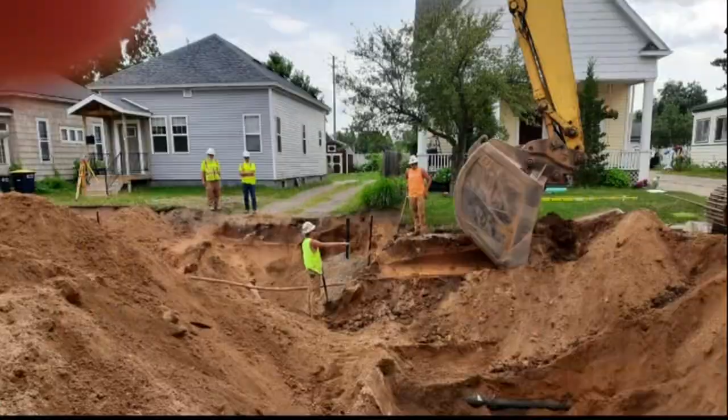And there is the valve box. There is your water distribution main, and so it goes from there. There's going to be a corp right there, and then it goes up to the valve, and then we stop right there at the property right of way. And that concludes this little session of water conveyance.

The riser for the hydrant, is that controlled at the valve or the shoe below so it doesn't freeze? Yes, the actual valve is down in the shoe or the boot. When the valve is closed, it drains into the ground so it doesn't contain water after it's turned off. There are bleeder holes in that system.

Any other questions? Very interesting, thank you. Next is item 10, recommendation for future agendas.

Does the board enjoy the educational presentations Randy's been doing? We thought they might be helpful to give an overview or base knowledge for the types of systems that the Public Works Board interacts with and oversees, but just want to make sure everyone thinks they're beneficial. We can always waive them if there are time constraints.